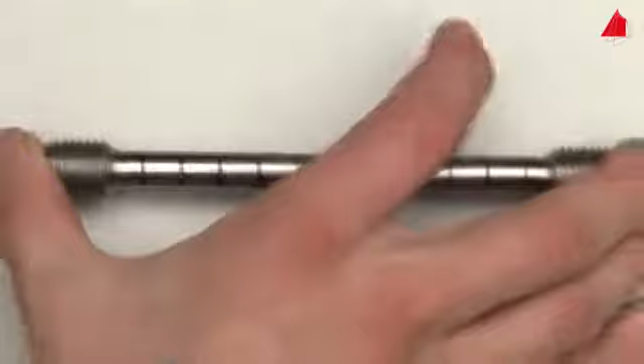It has a cylindrical test region with an original diameter of 10 mm and an original gauge length of 100 mm. Within this test region, distance marks have been drawn at regular intervals. They help to visualize and measure the plastic behavior of the specimen.

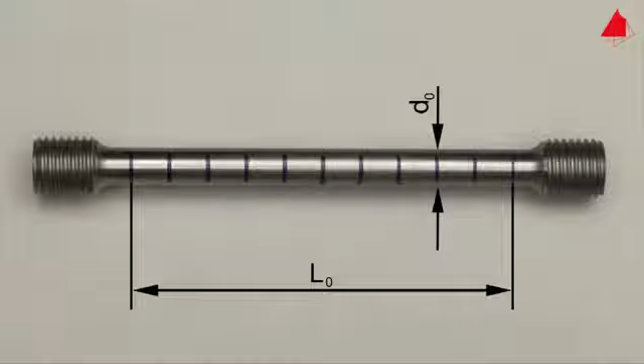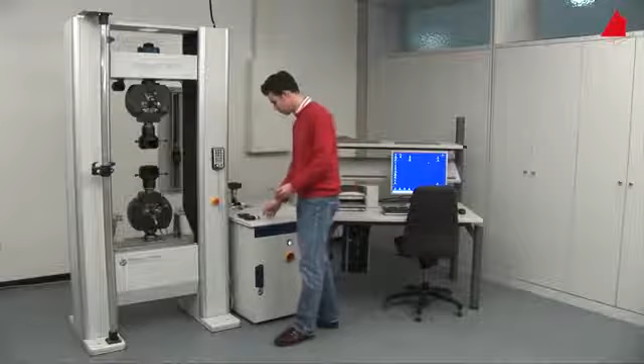Using a hand control, the tester moves the upper crosshead into its correct starting position. Now he can place the threaded ends of the test piece in the lower and upper grips of the testing machine.

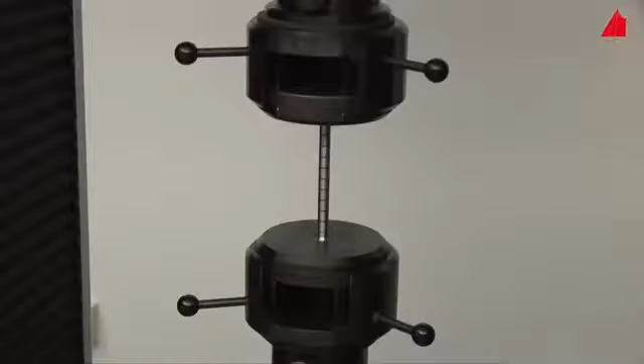In the next step, he swings the extensometer into its working position and checks that everything is correctly prepared. Then he selects all necessary testing parameters on the control computer.

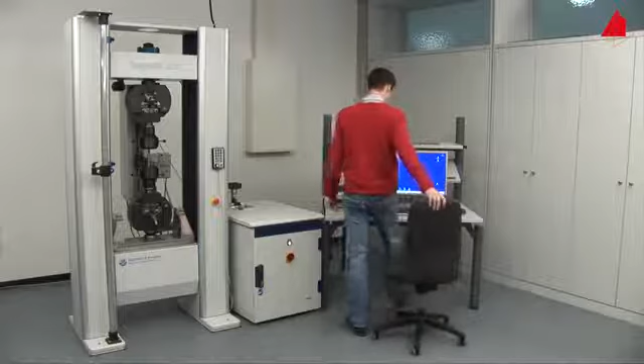Ready. The test starts and the extensometer's sensor arms are carefully pressed onto the test piece. This way, the gauge length can be measured throughout the whole tensile test. The gauge length is displayed at the bottom right-hand corner of the screen. At the beginning, it amounts to 100 mm.

During the tensile test, the test piece is slowly and constantly elongated with a standardized speed. The force that the test piece opposes to the imposed elongation is recorded and can be seen at the bottom left-hand corner of the computer display.

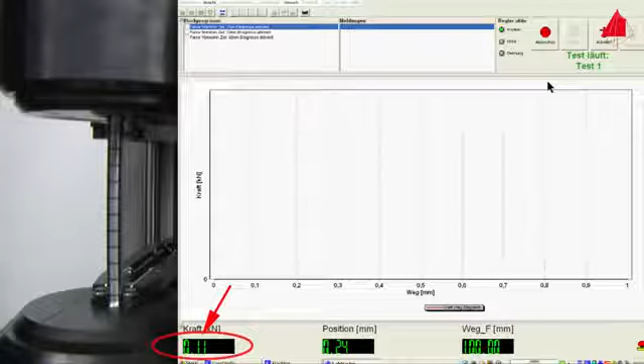The material behavior can best be observed in a force elongation diagram. The force F is being plotted upwards on the vertical axis, the elongation delta L towards the right on the horizontal axis. At first, the force rises rapidly.

Force and elongation are proportional and form a steep, straight line in the diagram. In this area, the material behaves elastically. If the test piece were to be unloaded from this area, it would spring back completely to its original length.

In materials with yield point phenomenon, the end of the elastic area can be seen clearly. The plastic deformation starts abruptly and is accompanied by a sudden drop of force. If the test piece were to be unloaded now, it would not spring back to the original length, but instead show a permanent elongation.

In the next stage of the tensile test, an almost constant force level with slight fluctuations occurs. This phenomenon is called the Luders effect. After a certain strain, known as the Lüders strain, the force increases again. The material opposes an increasing force against the imposed elongation. It strain hardens.

Up to the point of maximum force, the test piece is strained uniformly along its length. This means that the test piece gets longer and thinner but keeps a cylindrical shape.

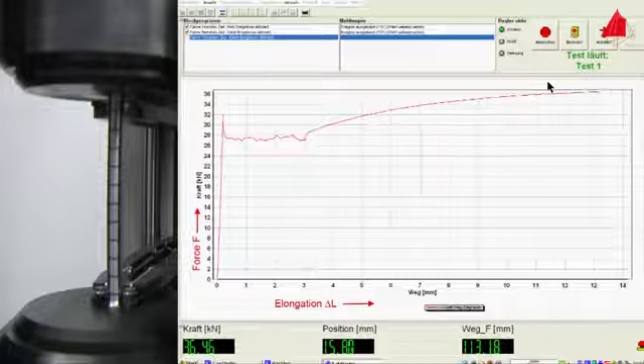As soon as the maximum force is reached, a neck begins to form at one point of the test piece. All further plastic deformation now only takes place at the neck, and eventually the test piece fractures there.

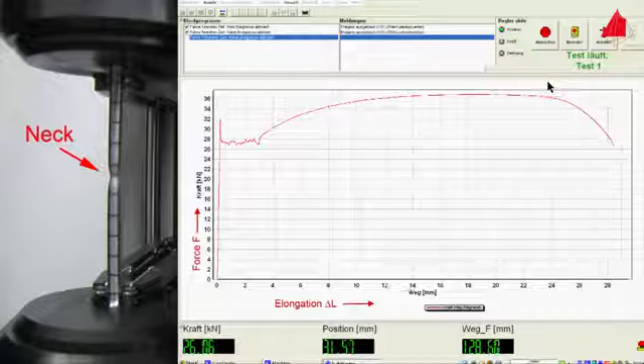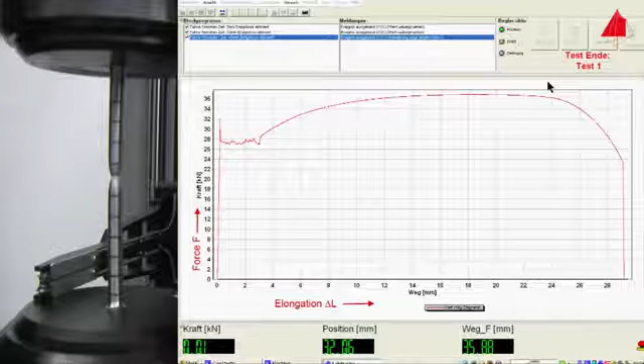In the recorded force elongation diagram, the force FEH at the upper yield point can clearly be seen. This is the highest force the test piece can sustain elastically. FEL is defined as the force at the lower yield point, Fmax as the maximum force. Using these forces, the strength properties of materials can be calculated.

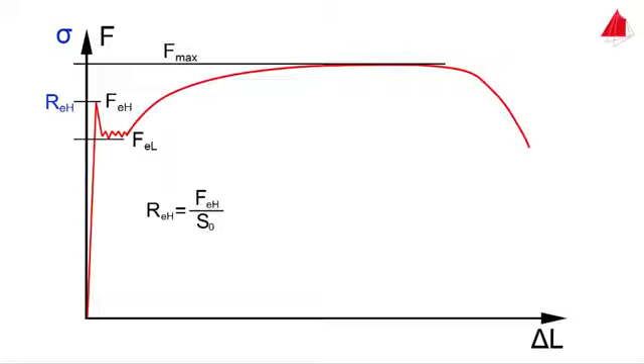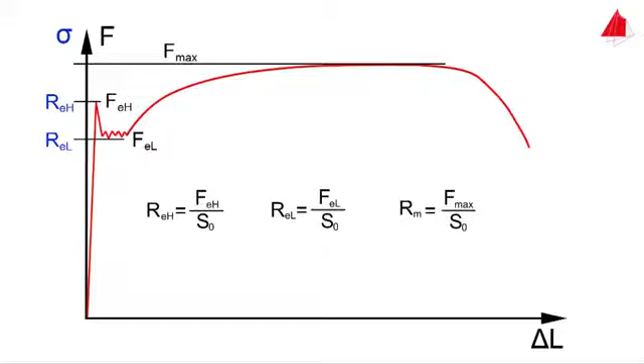The upper yield strength REH is calculated by dividing the force FEH by the original cross-sectional area S0. The lower yield strength REL is defined in a similar way. The maximum force divided by the original cross-sectional area is called tensile strength Rm.

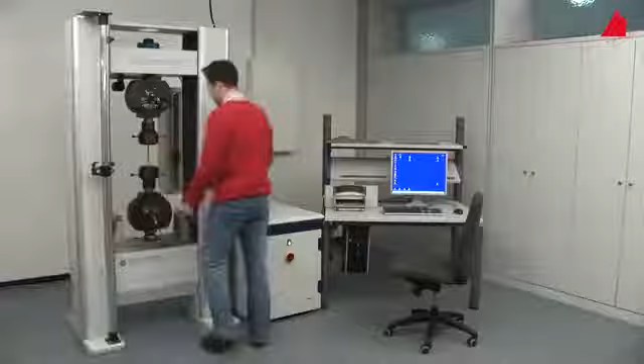In the last step, the tester swings the extensometer back into its resting position and removes the broken test piece.

On the work table, he puts the fragments back together again. With the help of the distance marks, the percentage elongation after fracture can be determined. This is the permanent strain after fracture and amounts to about 30% in this example.

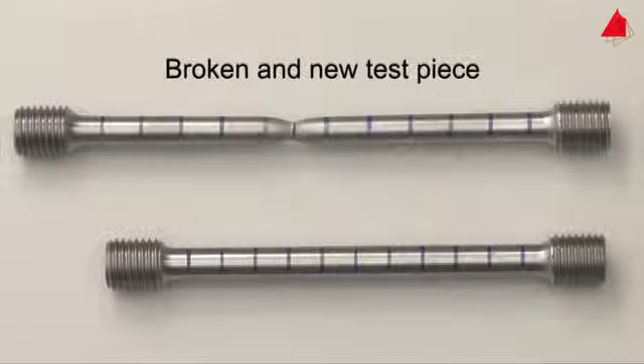Please note that the percentage elongation after fracture depends on the length to diameter ratio. By measuring the smallest diameter at the point of fracture, the percentage reduction of area can be calculated. It describes the reduction of cross-sectional area at the point of fracture in relation to the original cross-sectional area.

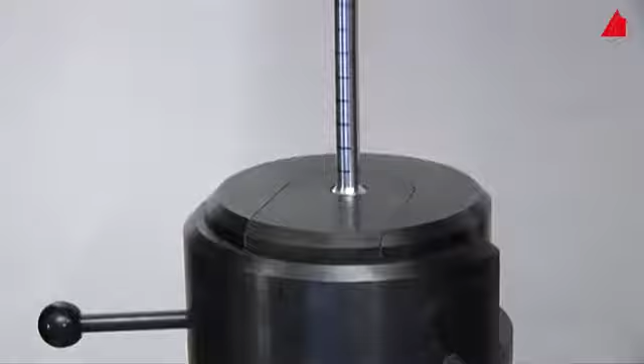In the second tensile test, a material without yield point phenomenon is to be tested. In this case, it is a precipitation-strengthened aluminium alloy. The test piece has exactly the same shape and dimensions as the specimen in the first test. It is cylindrical, with an original diameter of 10 mm and an original gauge length of 100 mm.

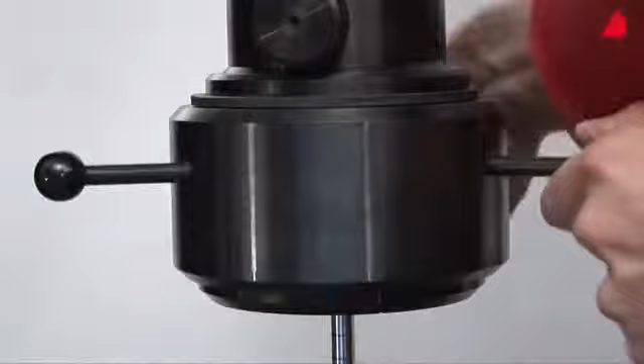After fitting the test piece into the testing machine and placing the extensometer into its working position, the test can start.

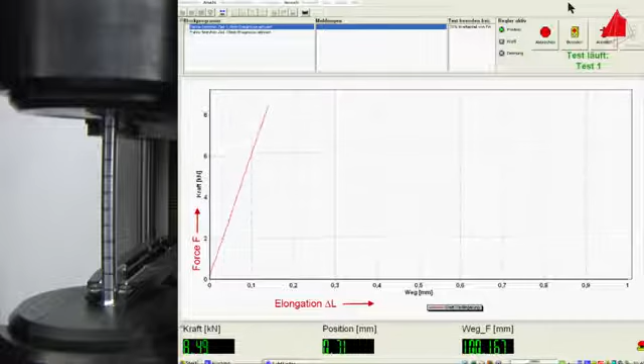The initial linear curve in the force elongation diagram again shows the elastic behavior of the material. But this time, the end of the elastic area is not revealed by a sudden drop of force or any distinct change. There is a smooth and gradual transition from linear elastic behavior to plastic deformation.

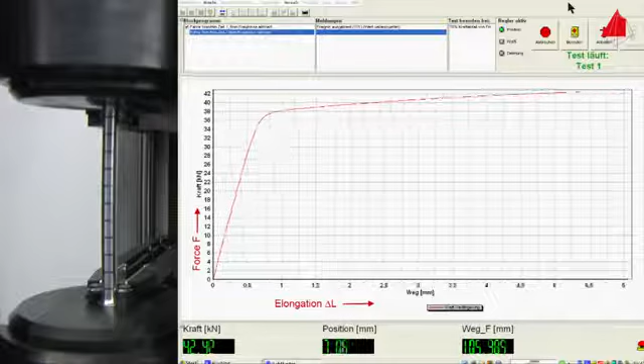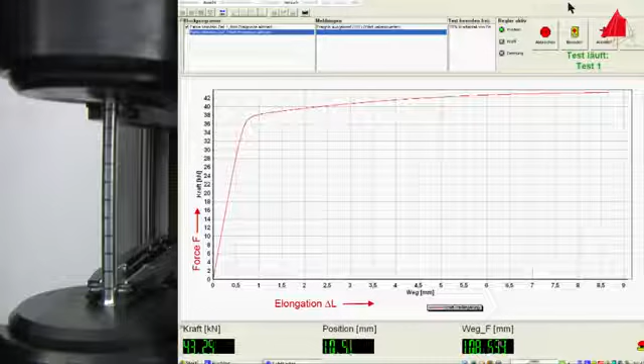In the further course of the tensile test, the force increases and the test piece again is strained uniformly along its length. At the point of maximum force, a neck develops, and all subsequent plastic deformation is confined to this neck until fracture finally occurs there.

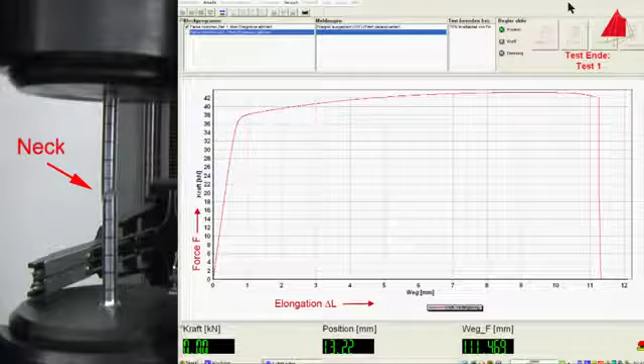As a common substitute for the yield strength, the 0.2% proof strength is used. It is the stress that causes 0.2% of plastic deformation in the material.

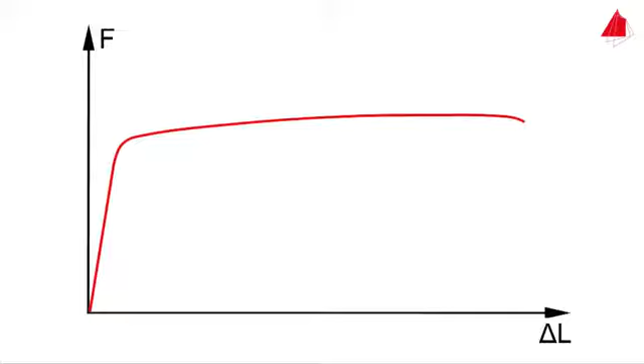And this is the way to calculate it. First of all, the elongation that corresponds to 0.2% of strain has to be computed. For an initial gauge length of 100 mm, the result is 0.2 mm.

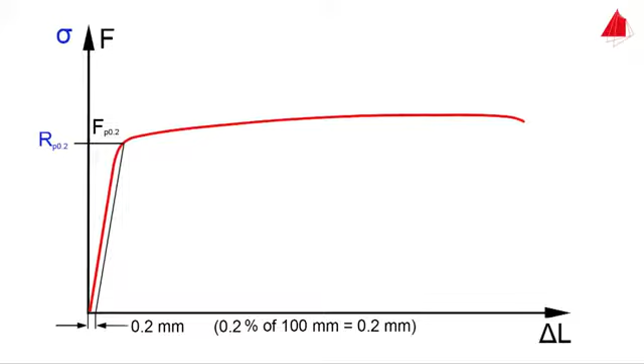In the force elongation diagram, a straight line parallel to the elastic line is drawn through the offset point of 0.2 mm of elongation. The force at the intersection point of the offset line with the force elongation diagram is designated as Fp 0.2. This is the force that causes a plastic strain of 0.2%. The 0.2% proof strength, Rp 0.2, is equal to Fp 0.2 divided by the original cross-sectional area S0.

Tensile strength, percentage elongation after fracture, and percentage reduction of area are calculated in the same way as in the first test.